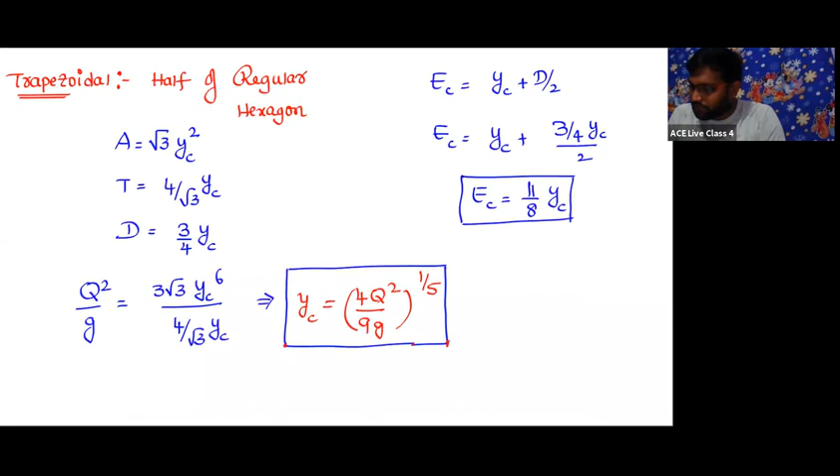Please have a look. So what is specific energy? Specific energy is the total energy per unit weight by taking the channel bottom as a datum. The basic assumption we make here is that the channel bed is horizontal and frictionless. So the specific energy is Y plus V square by 2G.

The main applications of specific energy are to define the critical flow, as discussed in the last chapter, and to analyze flow over transitions. In the case of critical flow, it occurs when specific energy is minimum, and when specific energy is minimum, the discharge per unit width is maximum.

We discussed this using the specific energy curve, showing the relation between specific energy and channel bed. Whenever there is a rise in the channel bed, specific energy decreases, and since specific energy is a function of depth, the depth of flow also varies. So to study how depth varies as specific energy varies, we use the specific energy curve.

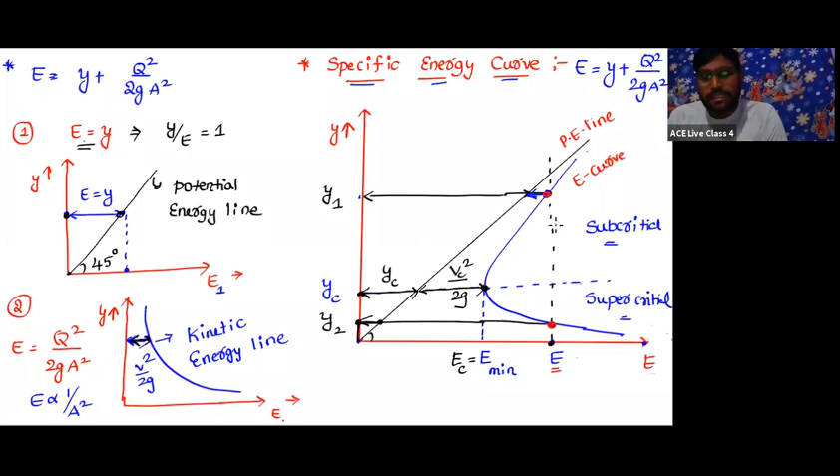In this specific energy curve, I explained how the curve is formed: E equals Y, the potential energy curve, and E equals Q square by 2G A square, the kinetic energy line. Combining these two, adding Y plus V square by 2G, gives the E curve, which looks like a cubic parabola. The shape of the E curve is a cubic parabola - not a 2-degree parabola, but a 3-degree, cubic parabola.

From there, we discussed that critical flow occurs at minimum specific energy, and for any specific energy other than minimum, there exist two depths known as alternate depths. In the E curve, the upper limb is asymptotic to the potential energy line, and the lower limb is asymptotic to the E axis. And I explained where we see the alternate depths.

Now the final conclusion is that in the E curve, in the subcritical zone, the curve is rising - meaning as specific energy increases, depth of flow also increases. In the supercritical flow, it's exactly opposite, because the curve is falling. So you can understand whether the curve is rising or falling, and based upon that you define the flow behavior.

This curve is especially useful in the case of channel bottom transition - meaning whether the channel bed rises or falls. So the specific energy curve is useful in the case of channel bottom transition.

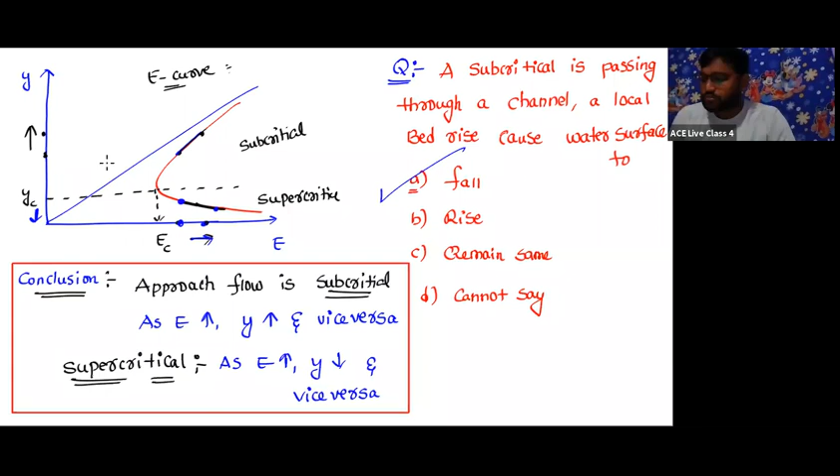Now, in order to go for the channel width transition - here there is no change in the channel bottom. When there is no change in the channel bottom, specific energy remains the same, because E1 and E2 are both the same. When E1 and E2 are both the same, you cannot use the specific energy curve. So this is a width transition.

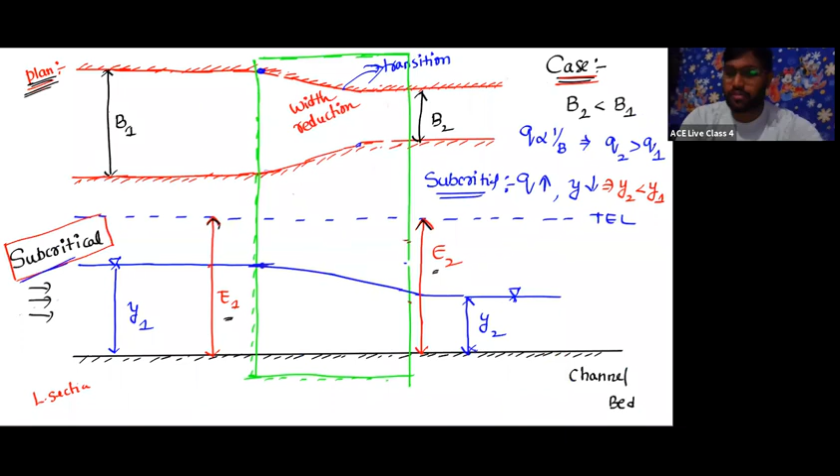Let's see how to analyze those transitions. By using this specific energy curve and discharge curve, as I already mentioned, the E curve and the Q curve are useful for flow analysis in channel transitions.

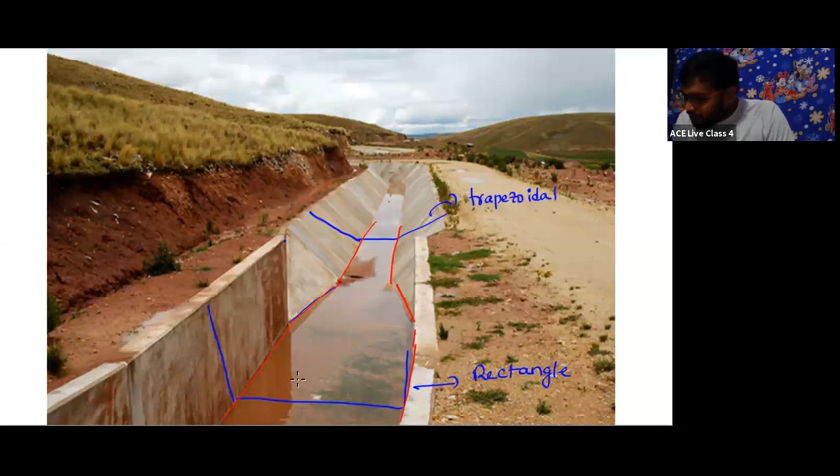If you see, the width of the channel has been reduced smoothly, yes or no? Initially the width of flow is going to be B1, and then the width of the flow is going to be B2. So in the plan view, the width has been reduced from B1 to B2. Whatever the width over here is going to be B1, and whatever the width here is going to be B2.

Now, when I allow the flow into this canal, I have to make sure whether the water surface level is going to be constant, or whether it is going to fall, or whether it is going to rise. So at this section, the cross section is going to be rectangle, and here it is going to be trapezoidal.

So during channel transition, the rectangular section changes to trapezoidal section, resulting in width transition. So I can say this is going to be a width reduction case. This is one practical example where whenever a channel cross section shape changes from one shape to another, there might be changes in the bed width, resulting in the width reduction transition.

So what is the use of this transition exactly? Whenever you are going to change the path of the flow, then definitely you require the transition. For example, you know the topography is not going to be linear, right?

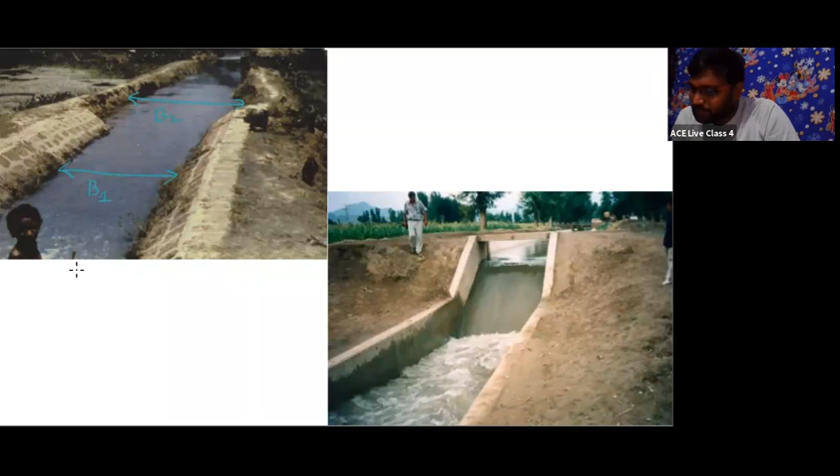This is width expansion case. And now you see here, this is a channel bed, right? And in this case, the width is going to be constant. Keep that in your mind, the width is going to be constant. This is width B, and here also width B.

But if I draw the longitudinal section, then the channel bed is going to fall like this. So the channel bed is going to drop something like this. Here this is a channel, and here this is a channel. The channel bed has been dropped like this.

So when the channel bed transitions, this is channel bed drop, transition. Whenever you are going to allow the flow from upstream to downstream, generally you allow the flow by means of channel bed drops. Why? We will discuss that later. So, channel bed drop, okay.

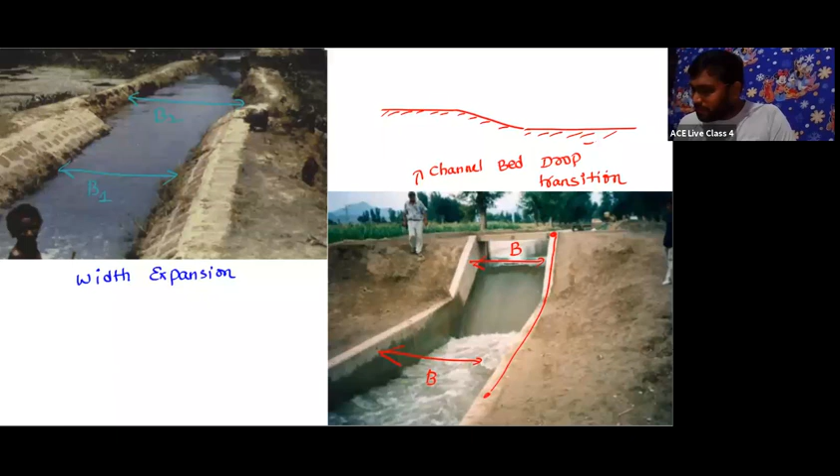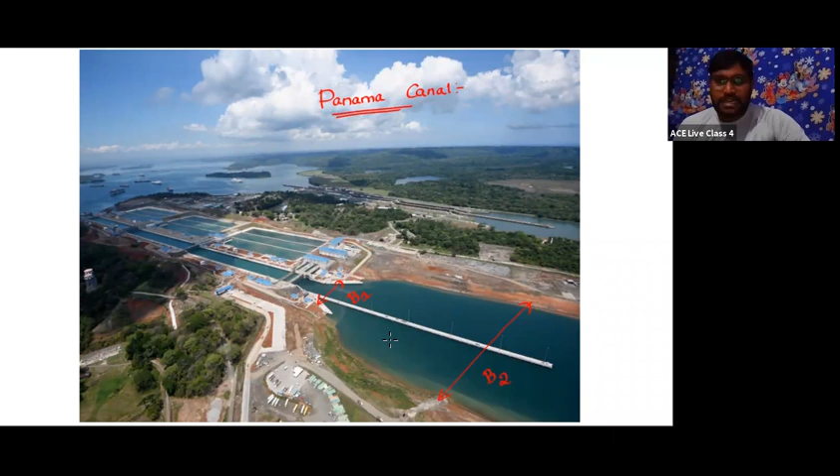So you can observe this Panama Canal is open channel flow, where the transition takes place smoothly. Observe clearly, does the transition happen suddenly or smoothly? Smoothly. They are not increasing suddenly from B1 to B2, they are increasing over a period of time. So again, what is this? Width expansion. When you see the flow coming from here, there is width expansion. If you see the flow going from here, this is width transition.

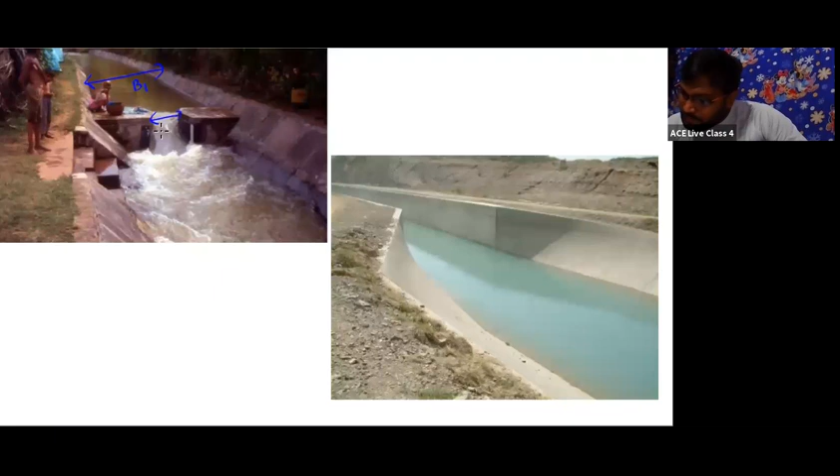Now there is the Panama Canal, and likewise you can observe over here also. So here this is the width of B1, and here this is width B2, and again here there is a width B3. So there you can observe the width is going to be reduced, and then the width is going to be expanded. So here there is a width reduction and a width expansion, my dear.

And you can see here the shape of the channel is going to be rectangle. And then similarly, there is a parabolic section, this is a parabola. And then there is a trapezoidal section. So the widths are going to change from B1 to B2. So rectangle, this is the parabola, and this is the trapezoidal.

So wherever the channel sections change from one shape to another shape, or whenever you want to lower the bed level, there we apply the channel transition conditions. And apart from this, the same figure - so what I'm showing you here is the similar type of figure. We have different names in irrigation. In irrigation, we call this one a canal fall, or a chute spillway. Some other names would be there, and we'll see that later.

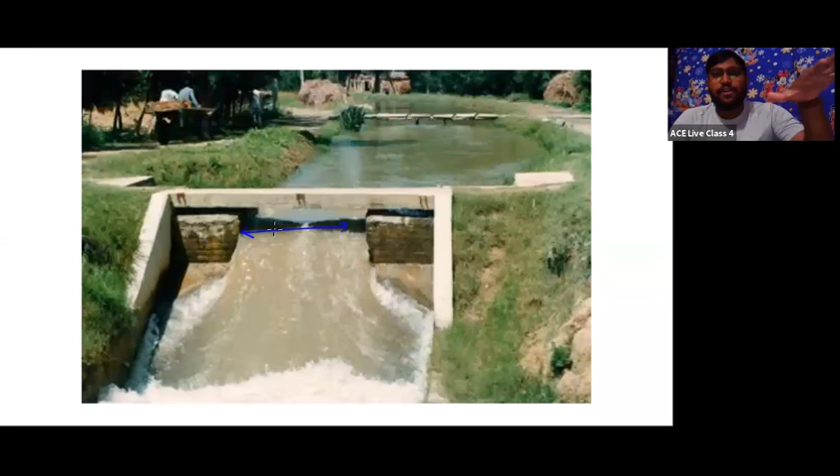Coming to channel bed drop and channel bed rise, that depends upon the topography. When the flow is happening from high level to low level, you have to lower down the bed. Here there is a width expansion and a channel bed drop — you can observe this is nothing but a double transition.

Here this is a double transition because B1 and B2 are different widths, and the channel bed is also going to drop. If I draw the channel section, this is the channel bed drop — so bed drop and width expansion together. This is the double transition, my dear.

So now let's see how we are going to do the analysis for this by using the specific energy and discharge curves.

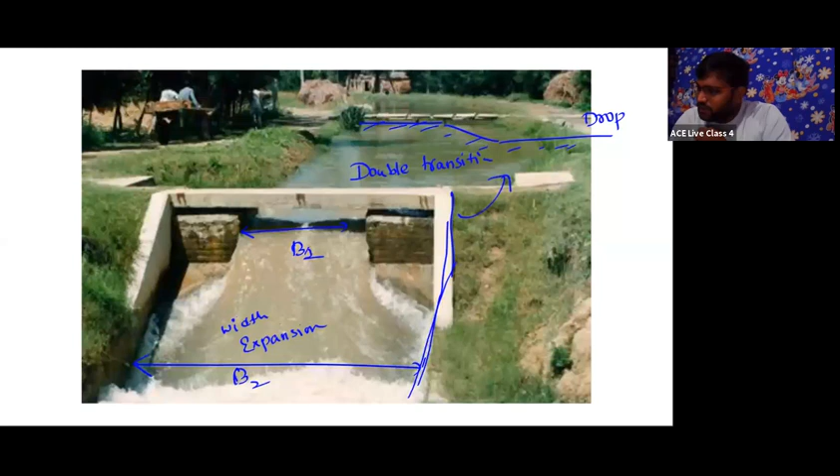In the example, why did this textbook specifically provide a parabola curve? They provide the parabola curve specifically for achieving the smooth transition — in order to make sure the transition is smooth, they provide the parabola curve.

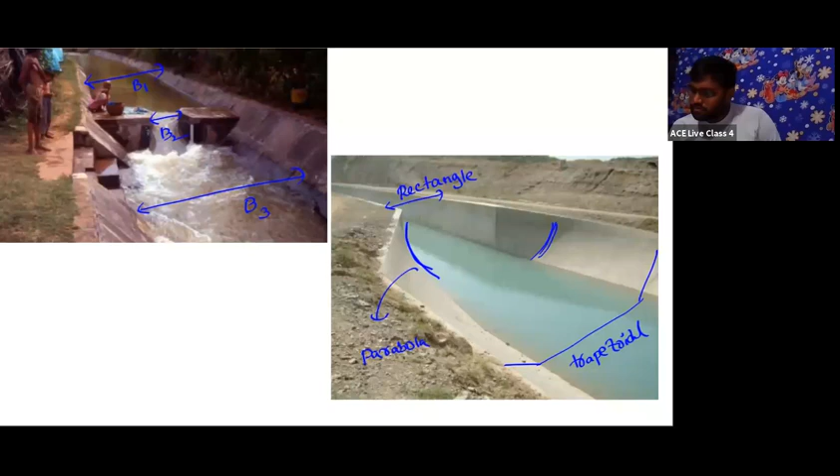Okay, fine. Now let's come to the analysis of channel transitions. In the case of channel transitions, we have a channel width transition and a channel bottom transition.

Keep one thing in mind: we are going to discuss one transition at a time. We don't discuss both transitions at the same time, because theoretically it is not possible to predict the flow behavior for double transitions.

Then what to do, sir? We go for numerical or experimental analysis. So from the exam point of view also, what I'm going to analyze is single transitions, and then we apply numerical analysis for the double transitions. Keep that in mind.

When I discuss one transition, meaning if the channel bottom rises or drops, we keep the width constant — there is no transition in width. Similarly, whenever there is a channel width transition, we assume the channel bottom remains horizontal, meaning there is no channel bottom transition.

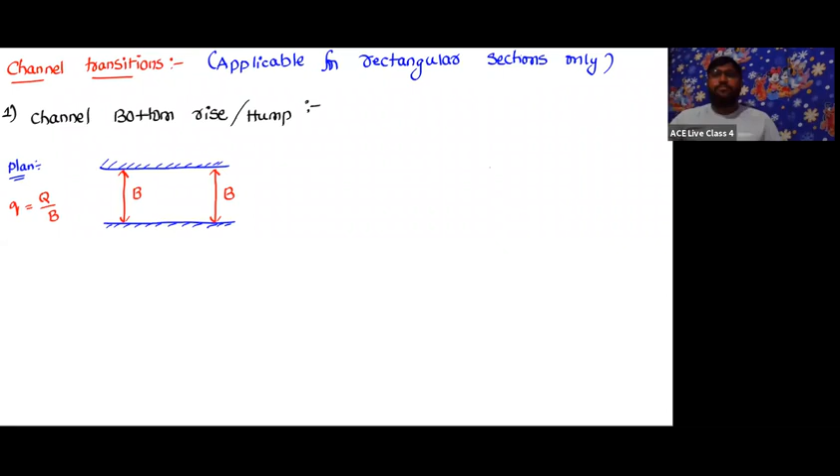So what we are going to do here is, we are going to assume the channel bottom remains, the channel width remains same. Assume channel width remains same throughout the transition. Channel width is going to remain same throughout the transition. So throughout the transition, we are going to make sure the channel width is constant.

And now, if I draw the sectional view, what I'm showing you here is a channel bottom rise, right? So now, keep that in your mind. You have to rise it with a smooth transition. So this is a channel bed rise. Let me draw these things.

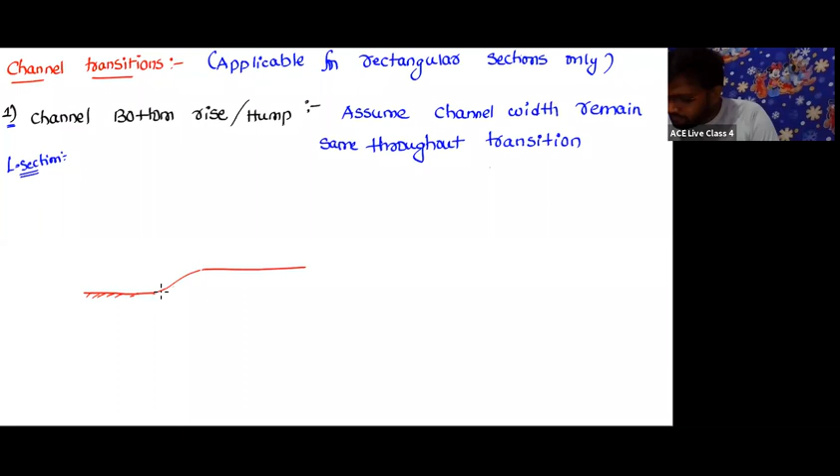So it remains same throughout the channel. Let me draw these things over here, because I want the longitudinal section. In the longitudinal section, you see the channel bottom is going to rise. The channel bottom is going to rise. Let's take the channel bottom rising by an amount of delta Z. By an amount of delta Z. Keep that in your mind.

The channel bottom, see point number one: assume channel width remains same throughout the transition. So whatever the width is over here before the transition and after the transition, the width is going to be same. This is going to be B1 and here it is going to be B2, both are same. So the width before the transition and after the transition is going to remain same.

And the second point is we need to assume the channel bed should be horizontal and frictionless, before and after transition. So before and after transition, I am going to make sure whatever the channel bed is, it is going to be horizontal and frictionless.

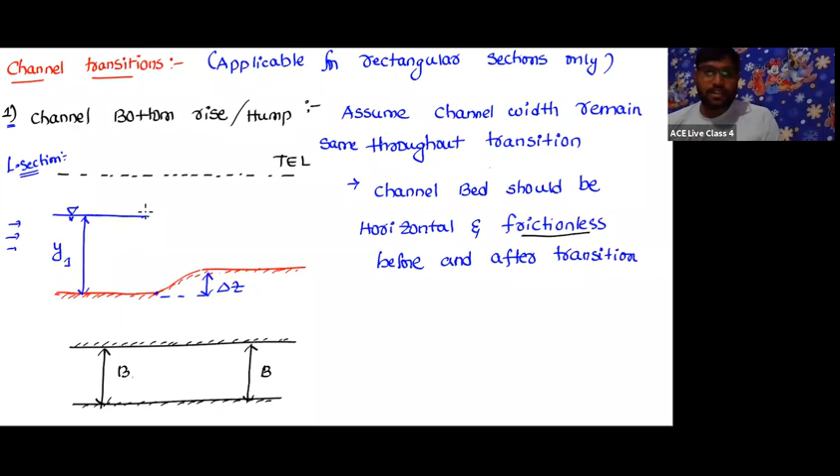Now I am allowing a flow. Let's take the depth of flow initially. The depth of flow is going to be y1, okay, and it is going to be same up to this point, same like this. Yes or no? Now you see there is a transition, and in this zone of the transition, what is going to happen?

That's what we require now. So for that, let me take this. Which curve is going to be useful for the analysis of a channel bottom transition? Now you tell me. As the channel width remains same throughout the transition, which curve is going to be suitable? Specific energy curve or discharge curve? So, specific energy curve.

If you observe over here, yes, now please have a look. Whatever the specific energy before that transition, this is known as E1, and whatever the specific energy after that transition, this is known as E2. Okay, so now from this, can I write E1 equals E2 plus delta Z?

So as the specific energy changes and the Q remains constant - Q remains constant because what is small q? Capital Q by B. So as the specific energy changes and the Q remains constant, which curve is going to be useful? So the specific energy curve, or in simple words, the E curve is used for analysis. These are the points that we need to keep in mind.

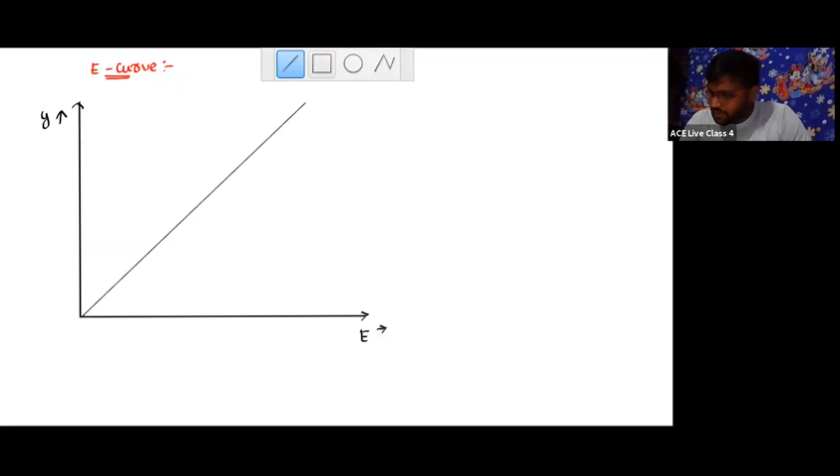So whatever this curve is going to be, the E curve, don't think this is going to be parallel to the potential energy line. And you know why it is not going to be parallel to the potential energy line. So keep that in your mind.

Whatever this is nothing but E minimum or EC, and the corresponding depth is going to be YC. And you know, above this zone is going to be subcritical.

So now let's observe. See, whatever curve we need to analyze, we have the curve, and the entire data required for that is ready with us. Now let's see point by point.

What is happening? When the channel bed rises by delta Z, that's point number one, keep that in mind. When the channel bed rises by delta Z, what is happening to specific energy? When the channel bed rises by delta Z, specific energy decreases from E1 to E2. Yes or no?

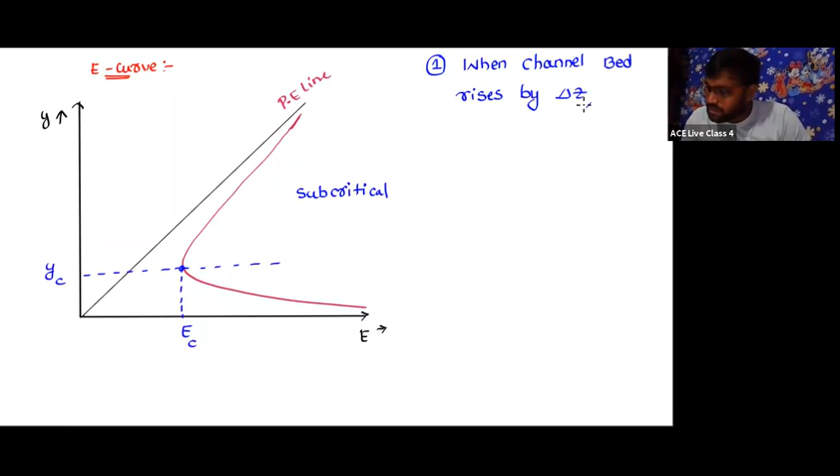So this is the specific energy, right? The specific energy decreases from E1 to E2. Specific energy decreases from E1 to E2, which means E1 is greater than E2, and E1 equals E2 plus delta Z.

Yes or no? Now let's see if the approaching flow is going to be subcritical. You know how to say whether the flow is subcritical or supercritical? Whenever the Froude number is less than 1, that is going to be subcritical. And if the Froude number is greater than 1, that is going to be supercritical. So first of all, let's keep this point in the graph.

Now here is a graph, right? So in this graph, let me take this as specific energy decreases, right? Let me take this as E1. Now, due to when the channel bed rises by delta Z, what is happening? Specific energy decreases from E1 to E2. Now this is going to be E2.

Now my dear, this specific energy decreases from E1 to E2 by how much? By delta Z only, right? What is the difference between E1 and E2? Delta Z. So which means, can I say this difference between these two is delta Z? Yes or no? So now from the starting onwards to this point, whatever this is, is nothing but E1. And can I write E1 as E2 plus delta Z? So point number 1, when the channel bed rises by delta Z, specific energy E decreases from E1 to E2 by delta Z.

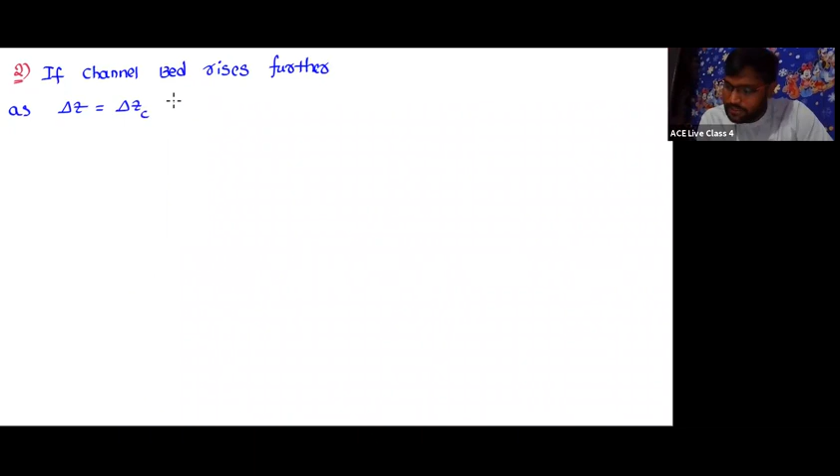Point number 2. When or if channel bed rises further as delta Z equals delta ZC, then specific energy becomes minimum. When specific energy becomes minimum, then E2 equals E minimum equals EC.

Then what is the relation between the specific energies? This is nothing but E1 equals E2 plus delta ZC. So now on the upstream side, the specific energy is going to be E1 only. But on the downstream side, now E2 becomes EC and delta Z becomes delta ZC.

So this will result in what type of flow? Results in critical flow, and downstream water level depth shifts as Y2 equals YC. Downstream water level depth will shift as Y2 equals YC, because this is going to be the critical flow.

Now I hope you understood what is happening, because what I am discussing is nothing but subcritical flow. See, I am not saying here as a water level depth falls or rises, I am directly saying as a shift. So if you have any doubt, please understand these values. So if you raise the channel bed by delta ZC, then E2 becomes E minimum or EC. So what is EC? EC is nothing but the E minimum. Then the water level depth is going to be fall by YC.

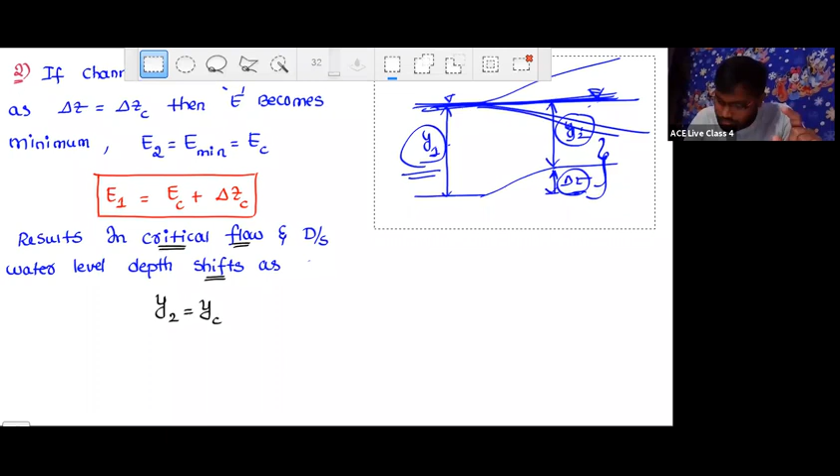Okay, so now the thing is, what if I raise the channel bed beyond delta ZC? I'm going to raise the channel bed beyond delta ZC. See, understand it clearly. What I'm showing you is in different variations. If I would have raised the channel bed now, this is a delta Z which is greater than delta ZC.

What if I raise the channel bed beyond delta ZC? If I raise the channel bed beyond delta ZC, what is going to happen to the E2? This E2, so my dear, now this E2 is going to be less than EC.

Is it possible? What is the meaning of E2 less than EC? You can observe in these figures: first E1, then E2 plus delta Z. Then if I raise by delta ZC, E becomes EC. If you raise more than delta ZC, then what is happening to E2?

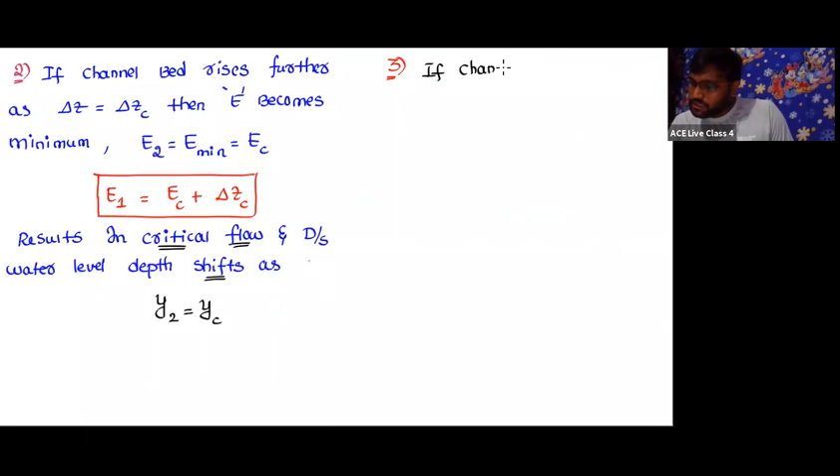Point number 3: if channel bed rises beyond delta ZC, let's say delta Z is greater than delta ZC, then specific energy should reduce, or specific energy should be less than E minimum, which means E2 should be less than E minimum. Is it possible? No, which is not possible.

Which is not possible, and flow gets stopped. Such a type of condition is known as choked condition. Flow gets choked, meaning flow is going to be stopped.

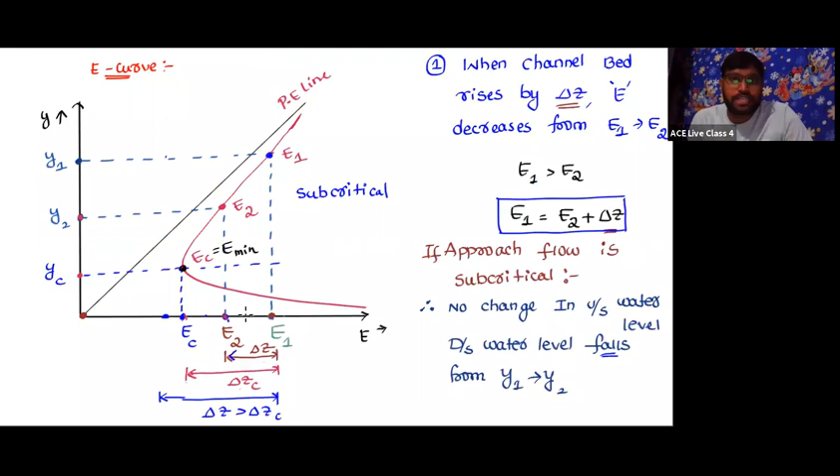So if I raise the channel bed, E should be less than E minimum. Generally, whatever mechanism I'm going through here, actually what is happening is you raise the bed, specific energy is decreasing, and if that is the case, then E2 is going to be less than EC. But I am telling you it is not going to be possible.

Someone might say, okay sir, you are saying it is not possible, but in reality I have to raise the channel bed more than delta ZC, sir. Then what is going to happen, sir? Now think, see, already you are going to raise the delta ZC, and if you want to raise delta Z more than delta ZC, whatever this is, nothing but delta Z more than delta ZC, and you want the flow to happen.

If you want the flow to happen now, the only possibility is: point number one, the difference between the specific energy should be delta Z. This is going to be E2, but this E2 is less than EC. This E2 is less than EC, it is not going to be possible, so I can remove this case.

Now, point number two is by keeping the downstream E2 as EC only. Now, if I increase the channel bed as delta Z, which is greater than delta ZC, what is going to happen? This is case 2, my dear. What I'm representing here is nothing but case 2.

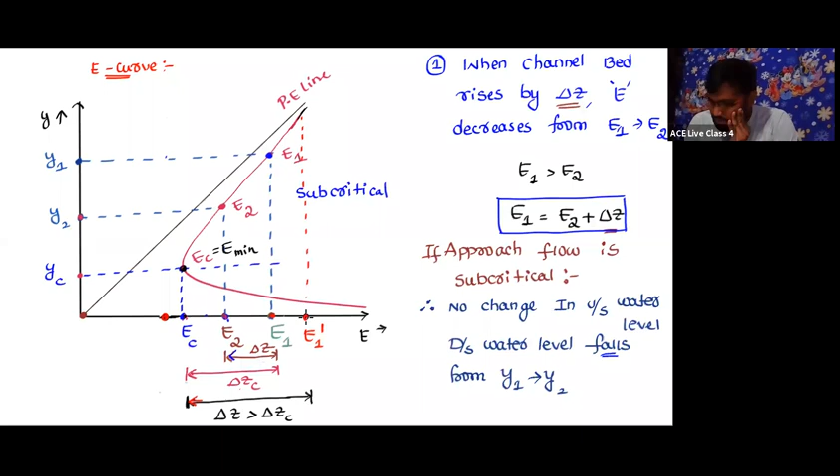Okay, now if E1 is going to change to E1 dash, let's come to the graph again. If E1 is going to change to E1 dash, now for this E1 dash, if I drop a line, what is happening to the value? Now this is going to be E1 dash.

What about here? This is E1. Now what is happening? Everything is explained in this graph itself. So at first, specific energy is going to be decreased from E1 to E2, and then it decreases to EC.

Now if you rise further, then this value cannot be less than this one. The specific energy cannot be less than EC, so E2 becomes EC, but E1 is going to be changed from E1 to E1 dash. Then what is happening to Y?

So this is Y. What is happening to Y? Y is going to be increased from Y1 to Y1 dash. And what about Y2? Y2 will remain YC.

So from this graph, I can say when the specific energy rises from E1 to E1 dash, who is going to be changed? Upstream or downstream? Upstream is going to be changed from Y1 to Y1 dash. So I can write from here, from E curve.

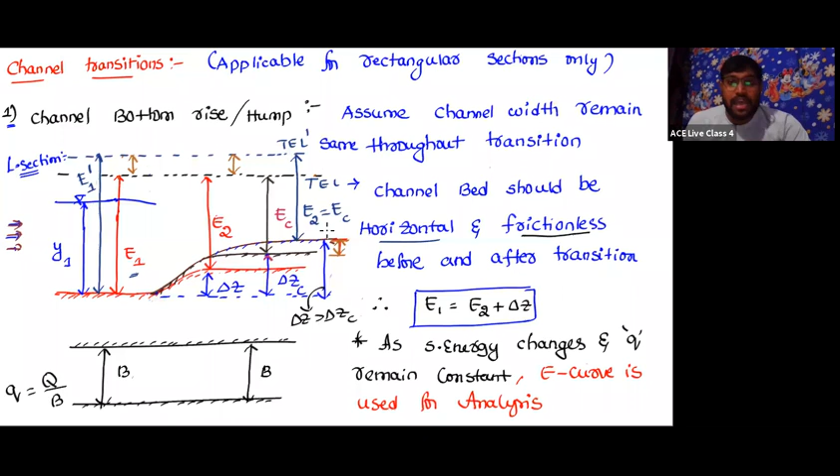The upstream specific energy will increase by exactly this value: 0.7 minus 0.5, which is 0.2. So the difference between E1 and E1 dash is nothing but the difference between delta Z and delta ZC. Whatever excess bed rise you do, that much the total energy line is shifted. So with this example, if you raise a channel bed by more than 0.5, that much specific energy increases.

Now still it's not completed. Let me handle this with a figure, the practical view.

So in order to not cause any changes in the upstream, when is the upstream water level going to change? Whenever the channel bed rises more than delta ZC, then only the upstream water level is going to change. Yes or no? So if you don't want any change in the upstream, then what is the maximum rise that you need to do? The maximum rise without change in upstream is going to be delta ZC only, because I can write a note point over here.

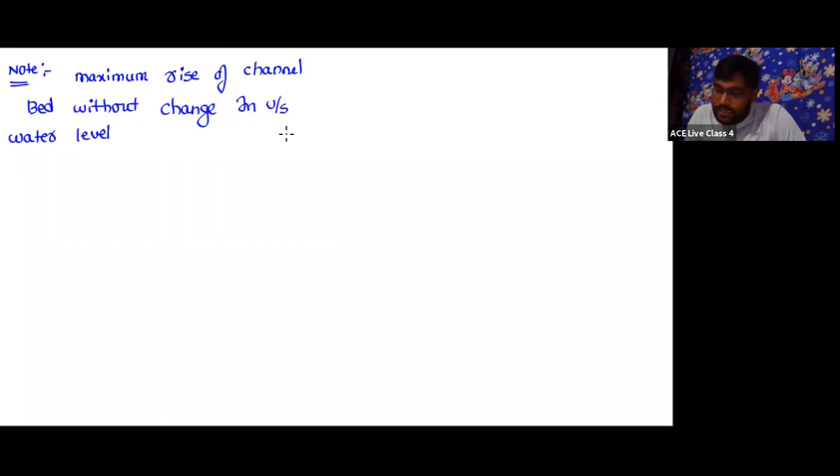The note point is the maximum rise of channel bed without change in upstream water level, is delta ZC. Why? Because up to delta Z equals delta ZC, there is no change in the upstream, only the downstream is going to change.

So whenever the delta Z is going to be more than delta ZC, then the upstream water level starts to change. Yes or no? So this is happening when the delta Z is more than delta ZC.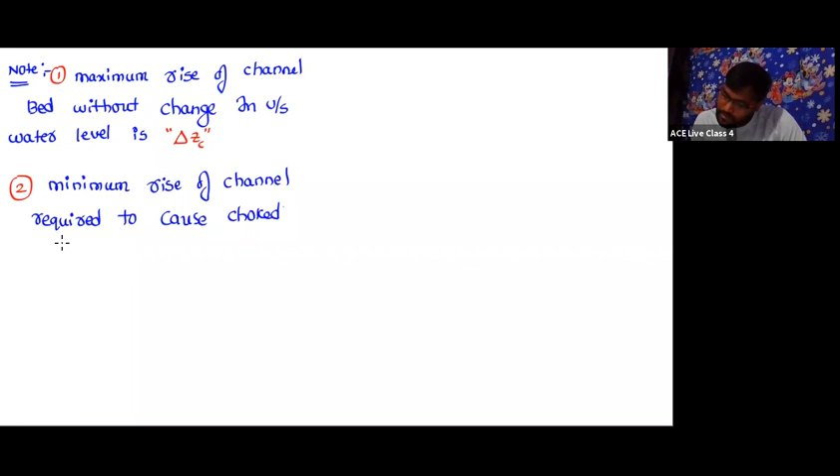Or second one, the minimum rise of channel bed required to cause choked condition is also delta ZC. So whenever delta Z becomes delta ZC, from there only the choked condition is going to happen. Yes or no? So the minimum rise required to cause a choked condition is delta ZC, because once you go beyond delta ZC, then obviously the choked condition is going to exist.

And the maximum rise without any change in the upstream water level is also delta ZC, because if you go beyond delta ZC, the upstream water level gets disturbed. Okay, so now I hope you understood the figure.

Please try to analyze this specific energy curve clearly, because this is very, very important. If you can understand this specific energy curve, then I don't need to explain much. So please go through the specific energy curve once, what is happening actually. You observe these figures, I'm giving you everything in this case.

First E1, then the channel bed rises by delta Z, specific energy decreases from E1 to E2, flow depth decreases from Y1 to Y2. Please listen once again, I'm giving a final review. So whenever the channel bed rises by delta Z, specific energy decreases from E1 to E2, and when specific energy decreases from E1 to E2, flow depth decreases from Y1 to Y2.

Now, if the channel bed rises further as delta Z becomes delta ZC, then specific energy E2 becomes EC, and Y2 becomes YC. So there's no change in upstream, but Y2 becomes YC. So critical flow occurs at delta Z equals delta ZC.

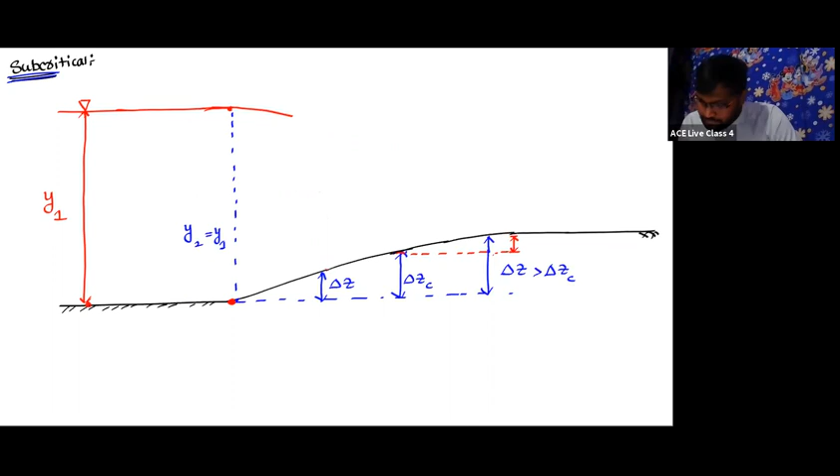So up to delta ZC, the water level is going to be fall, fall, and now by the time it reaches delta ZC, at this point, can you please tell me what is the flow depth over here? The depth of flow is going to be Y2 is equals to YC. So whatever I am drawing over here, this is the water surface. So the water level falls and reaches the water level Y2 is equals to YC.

Now you see, from here only everything is going to be changed. So if I rise the delta Z beyond delta ZC, the downstream specific energy becomes EC only, but whatever the depth is going to be, is it same or not? You see, now in the case of delta Z greater than delta ZC, the downstream water level depth should remain as Y2 is equals to YC.

The water level depth should remain as Y2 is equals to YC. So what is the tendency of the water level here? What is happening? The tendency of the water level is going to be falling like this. But now, when I rise the delta Z beyond delta ZC, up to delta ZC water level has fallen down, so that Y2 is going to be YC. Y2 less than Y1 and Y2 becomes YC.

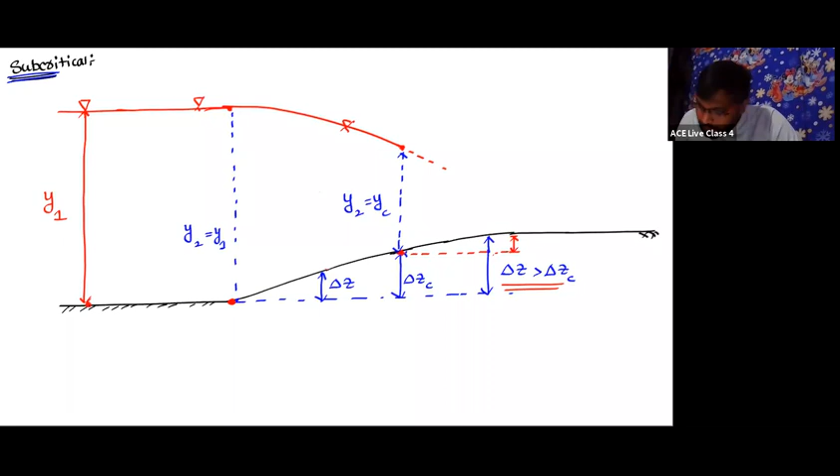Okay, fine. Now think clearly: when you rise the channel bed delta Z more than delta ZC, what is the downstream depth? The downstream depth will remain as YC. So if the downstream depth is going to remain as YC, now whatever the depth everywhere, here the depth should be YC, and here also the depth should be YC. So everywhere the depth should be YC.

Now, this is a case where the channel bed rises more than delta ZC. Whenever the channel bed rises more than delta ZC, what is happening to Y2? Y2 is still going to be YC. This magnitude is YC and this magnitude is also going to be YC. Whenever the magnitudes of the depth are the same, the channel bed rises by how much extra? This is the extra. So now, is the water level going to fall or is it going to rise? Come on, tell me.

Up to this point of delta ZC, the water level has fallen down, and now the downstream water level is going to rise like this.

Now some of you are asking, sir, why is the specific energy changing now? You see, if you raise the channel bed more than delta Z greater than delta ZC, the tendency of the water level is going to be falling. So this dotted line is nothing but the tendency. But when you raise delta Z more than delta ZC, the downstream water level depth remains critical. What is the meaning of remains critical? Y2 is equals to YC, and here also Y2 is equals to YC.

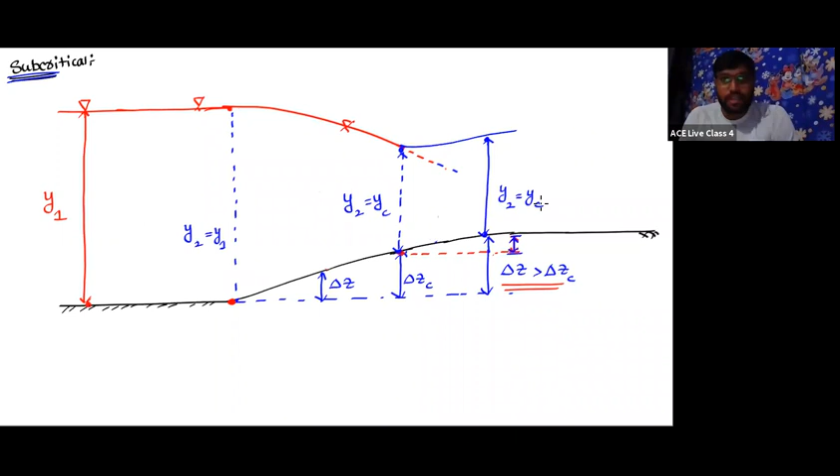So this water level is going to rise. Is it against the tendency or with respect to the tendency? It is against the flow behavior. And now what happens is this water level falls and suddenly rises.

Due to this sudden rise, it creates a wave movement, and this wave movement will travel towards the upstream. And this wave is known as a surge. In simple words, when you raise the channel bed more than delta ZC, the flow will not be steady. The flow will become unsteady.

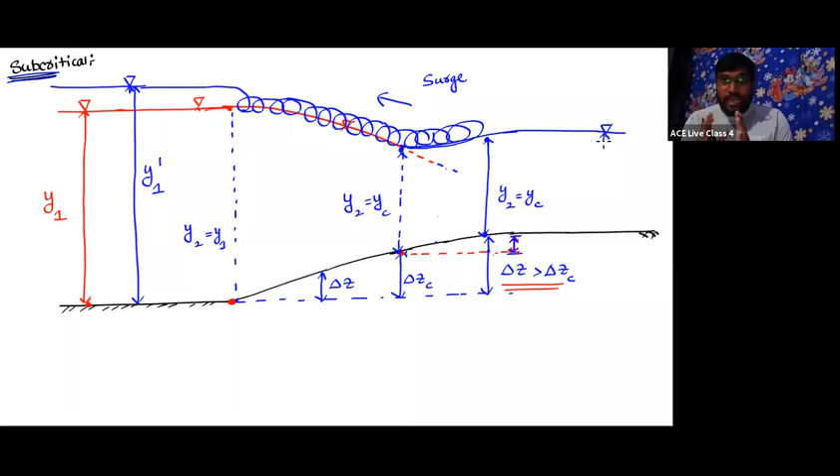So whenever the wave movement is created, this wave movement will travel towards the upstream, and then the upstream water level is going to change. Now it is no more the initial water level. Now the depth of the water level on the upstream side is going to be Y1 dash, and on the downstream side, the depth is going to be Y2 is equals to YC. So observe the point clearly. What I'm going to say now again is this surge is nothing but an unsteady flow.

So whenever the channel bed rises more than delta ZC, how much do you rise? You see, here the depth is going to be YC, and here also the depth is going to be YC. How do you make sure both depths are YC? At delta ZC, the depth is YC. Because when you make delta Z equal to delta ZC, E2 equals EC. When you make delta Z more than delta ZC, E2 still equals EC. So in both cases, Y2 is going to be YC.

And when does Y2 become YC? When does Y2 become YC? When the water level shifts like this, then only Y2 will become YC.

So in the natural state, in practical terms, you're an engineer. Whenever you raise delta Z more than delta ZC, what happens is up to delta ZC the water level falls. And if you raise the channel bed more than delta ZC, please observe this zone only. In this zone, instead of falling, the water level rises. And once the water level rises, it is against the tendency. As it is against the tendency, due to this sudden rise of water, this water will create a wave pattern, and this wave pattern will move towards the upstream.

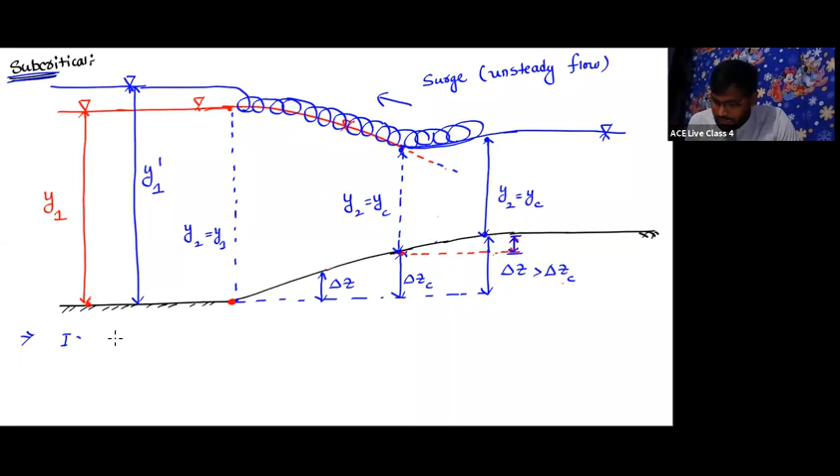So I can write: once delta Z is greater than delta ZC, then flow becomes unsteady, and the surge will travel from downstream to upstream, resulting in a change in water level and in specific energy on the upstream side because of the unsteady nature.

So a lot of people are asking why the specific energy changes, sir. Because due to the surge, it becomes unsteady flow. So the upstream specific energy increases from E1 to E1 dash.

I hope you understood. If you still don't understand, here's the practical reality: first the flow depth decreases, decreases, decreases up to delta ZC. And if you go beyond delta ZC, then a surge is created and it moves towards the upstream. So when the surge travels towards the upstream, the flow gets disturbed. So the upstream depth changes, and the upstream specific energy also changes. So this is what happens while the flow is subcritical.

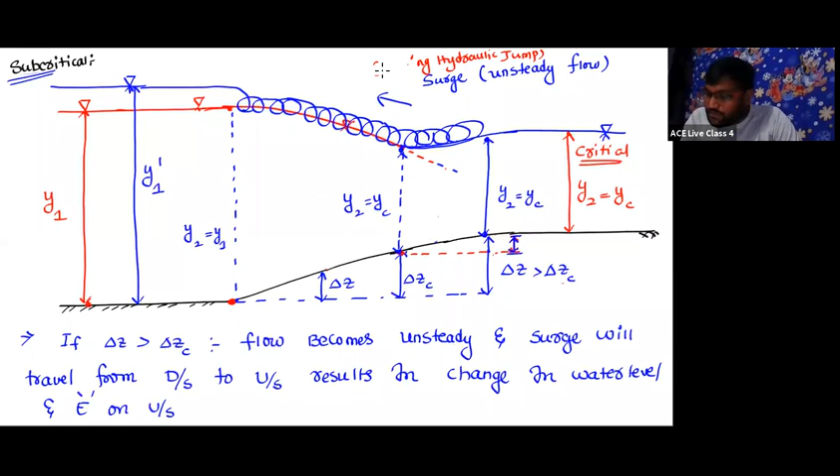So there is a difference between the hydraulic jump and the moving hydraulic jump, but don't worry about that, we'll discuss it later. What is the difference between the hydraulic jump and the moving hydraulic jump? But as of now, I hope you understood this. To make it much more clear, let me write the conclusion: when delta Z equals 0, then E1 equals E2.

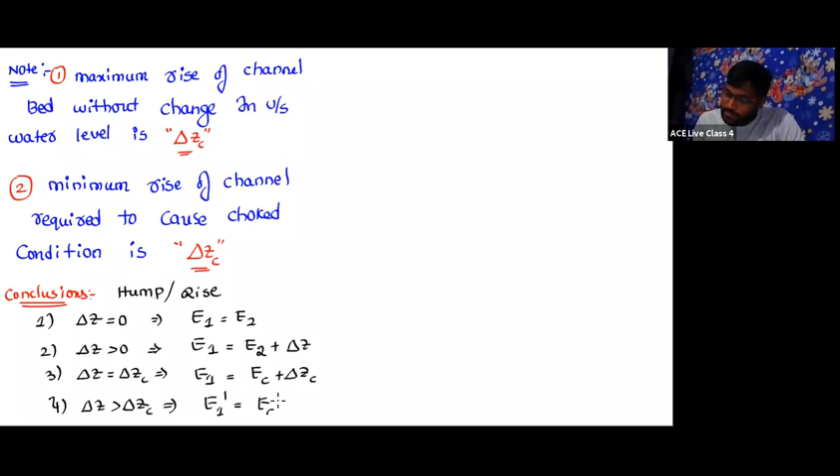Delta Z greater than 0 means the hump will rise. Then E1 is equal to E2 plus delta Z. When delta Z is equal to delta ZC, E1 is equal to EC plus delta ZC. When delta Z is greater than delta ZC, then E1 becomes E1 dash and EC becomes EC plus delta Z. So these are the relations between the specific energies with respect to the rise of channel bed.

Now I want to give one more data with respect to the tabular form. I am showing you the specific energy with respect to the longitudinal section, and I explained the concept with respect to the specific energy curve, giving you the points and how the flow practically happens. Now I'll give you the graphical representation.

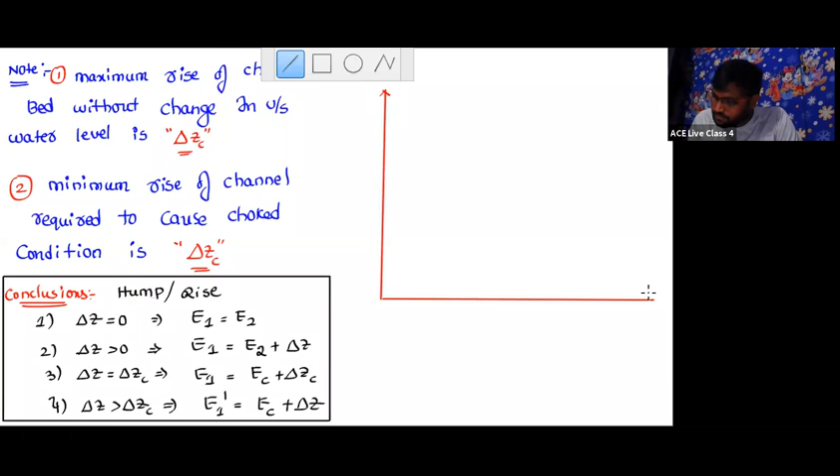Have a look at the graphical representation. On the x-axis is delta Z, on the y-axis is upstream and downstream flows, y1 and y2. This is for the subcritical zone, where the channel bed rises in the case of subcritical flow. Let me explain from here. This is delta Z equals 0, and somewhere delta Z equals delta ZC.

I want to show the variations here. Understand this, these graphs are very important because in recent years they've been asking about these things. This is an untapped area, it hasn't appeared much in GATE or IES. If I were an examiner, I would be the first to ask this question because it's untapped. So think carefully.

What happens when delta Z is 0? When delta Z is 0, are the specific energies the same or not? When the specific energies are the same, with delta Z equal to 0, the flow is subcritical, meaning the flow depth is large. Initially this is the flow depth. As the flow depth is large, you can observe at this point Y1 and Y2 are both the same.

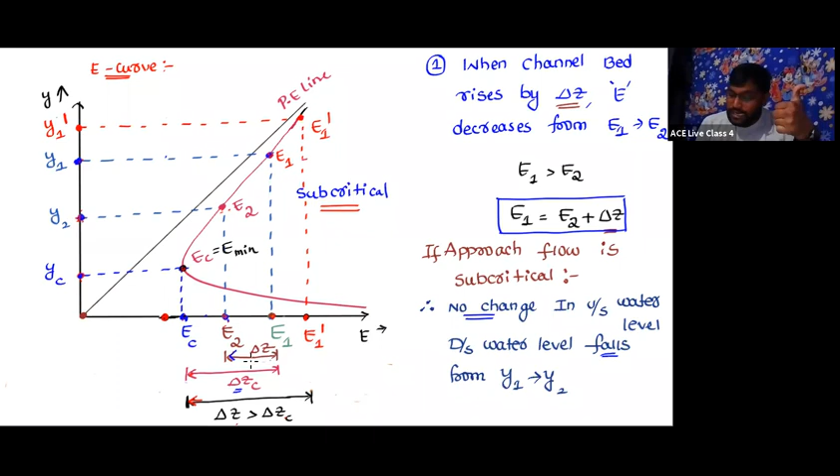When delta Z equals 0, E2 and E1 are both the same, Y2 and Y1 are both the same. Now, as delta Z increases, Y1 remains constant but Y2 decreases. Accept or not? And when delta Z goes up to delta ZC, which one changes - downstream or upstream? Think and say, downstream or upstream?

Downstream. So up to delta ZC, I am taking the upstream depth Y1 to be constant. Up to delta ZC, the upstream depth is constant, Y1. Any doubt with that? Now about the figure - up to delta ZC, I have shown you the red line only. The red line represents the initial depth. Y1 is constant and Y2 changes.

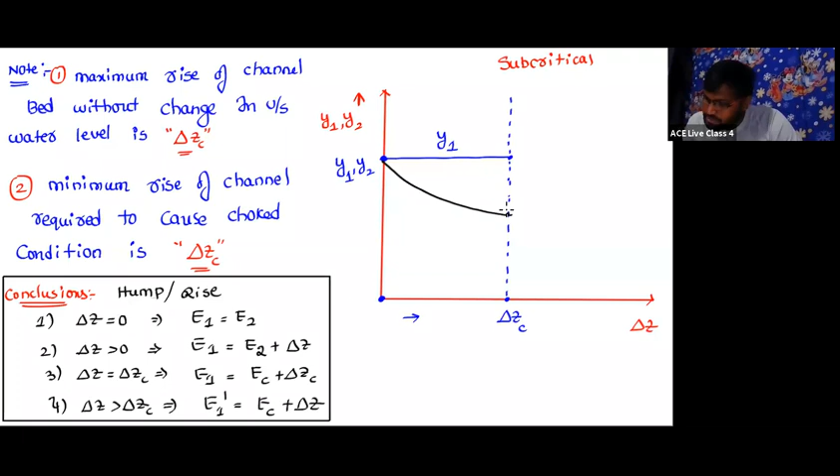Now what happens to Y2? Y2 decreases, and this is the variation of the water surface depth of Y2. So now at delta ZC, what is this Y2? Y2 is equal to YC. And what is Y1? Same. So now I hope you understood.

At delta Z equals 0, Y1 and Y2 are both the same. And at delta Z greater than 0 and less than delta ZC, as delta Z increases, the downstream water level falls as Y1 goes toward Y2.

So Y2 is less than Y1. In this figure, I am representing that Y2 is less than Y1. Now when delta Z equals delta ZC, Y1 is still Y1. But what happens to Y2? When delta Z equals delta ZC, Y2 equals YC.

Now if I go beyond delta ZC, is there any change in Y2? Everywhere Y2 is going to be the same. If you go beyond delta ZC, the downstream depth is going to remain constant with Y2 equals YC.

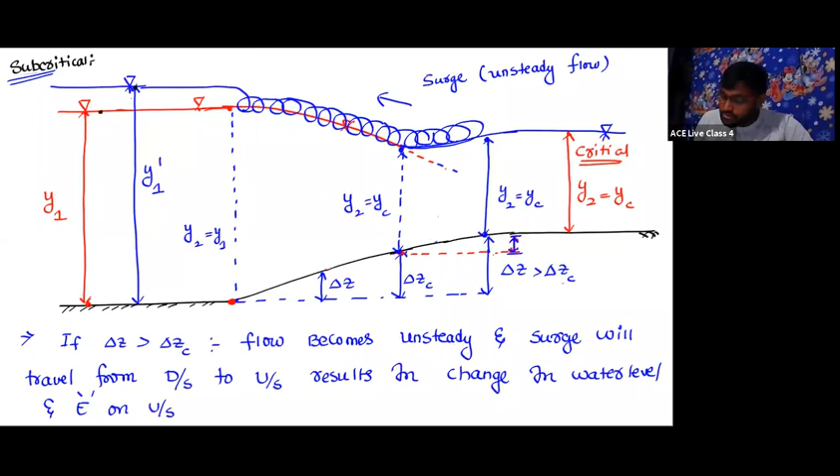But what is happening when delta Z is more than delta ZC? What happens to Y1? Y1 is going to increase to Y1 dash. So now Y1 is going to increase to Y1 dash.

This is nothing but Y1 dash. This graph represents that up to delta ZC, there is no change in the upstream water level depth Y1. Beyond delta ZC, the upstream water level depth increases. And up to delta ZC, the downstream depth decreases and remains critical. Beyond delta ZC, Y2 equals YC.

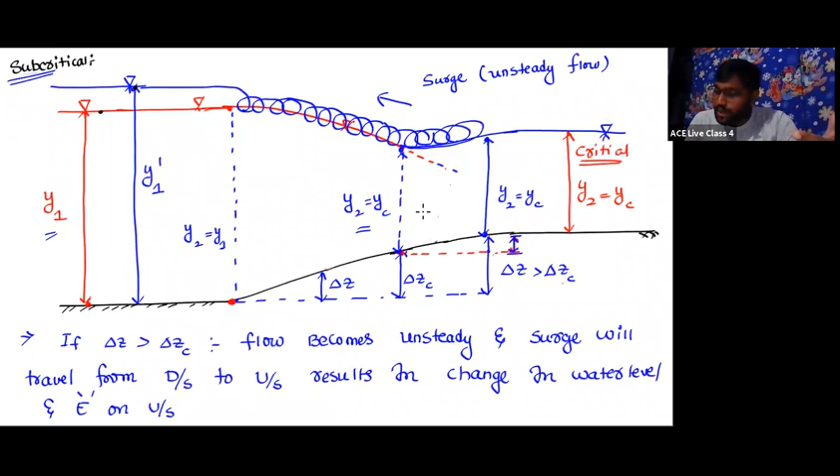If you still have any doubt, see this figure. Up to delta ZC, Y1 is constant and Y2 reduces to YC. Beyond delta ZC, Y2 becomes constant and Y1 increases to Y1 dash.

So if you still feel this is boring, that's up to you, because I have given you all the ways. Why I take so much time for one transition is, if you understand this transition, you can understand the remaining transitions clearly. I hope you understood this. So if you have understood, let's have a small break. This is the final thing. You can see this figure if you want.

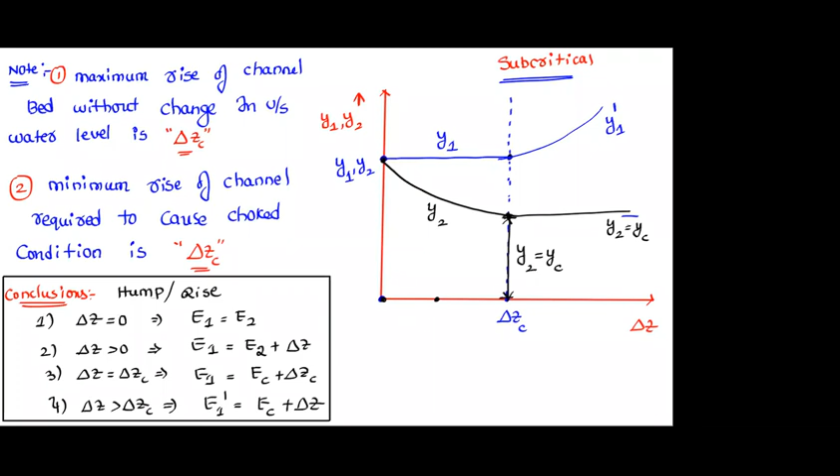As we have discussed the subcritical flow, let's come to the supercritical flow. If it is supercritical flow, I won't give this much explanation, I'll directly go with the specific energy curve. So this is about subcritical flow, and for all these things I have given this much information.

Now, in the case of supercritical flow, if the approaching flow is supercritical, what is going to happen? I hope most of the people are there. Okay, fine, now see.

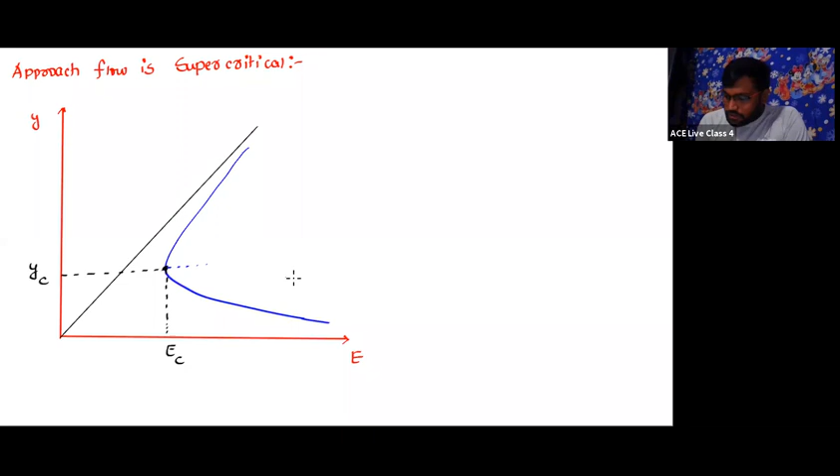I don't need to write every point now, as you know what happens when the channel bed rises further and further. If the channel bed rises, at first, if the channel bed rises by delta Z, you know this is nothing but the total energy line.

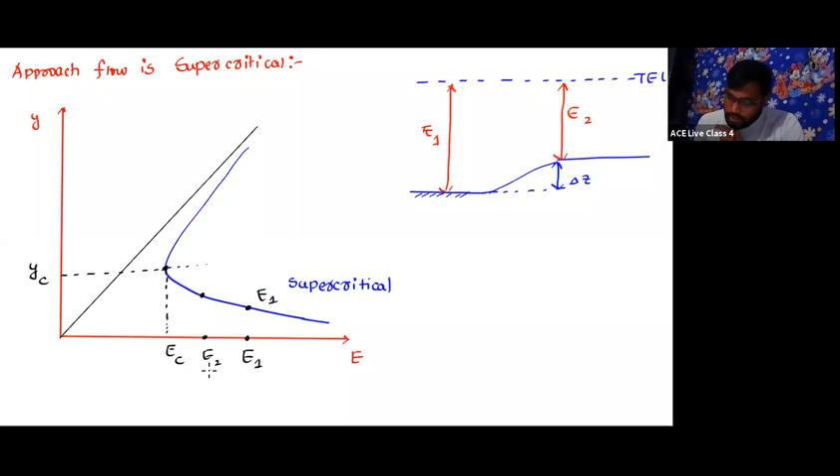Point number one, as the channel bed rises by delta Z, the specific energy E1 will reduce to E2. So now specific energy, somewhere it is going to be E1, and E1 is going to be reduced to E2. By how much? By delta Z. So this value is going to be delta Z.

Then what happens to the depth of flow? When the specific energy decreases from E1 to E2, in the case of supercritical flow, what is happening to the depth of flow? You see, whatever this depth of flow is, this is nothing but Y1. For E1, the corresponding depth of flow is going to be Y1.

Now, when you raise the channel bed by delta Z, as the specific energy decreases, this is a supercritical flow which is inversely proportional. So the depth of flow is going to increase from Y1 to Y2.

So as the specific energy decreases, the depth of flow is going to increase. Here Y1 is going to increase to Y2, my dear.

Now, if I raise the channel bed by delta ZC, then E2 is going to become EC. So E2 equals EC when delta Z equals delta ZC. If I take it as delta ZC, then E2 will become EC. When E2 becomes EC, then Y2 will become YC.

Y2 will become YC. So in the case of supercritical flow, the depth of flow is going to increase. Whereas in the case of subcritical flow, the depth of flow is going to decrease to YC.

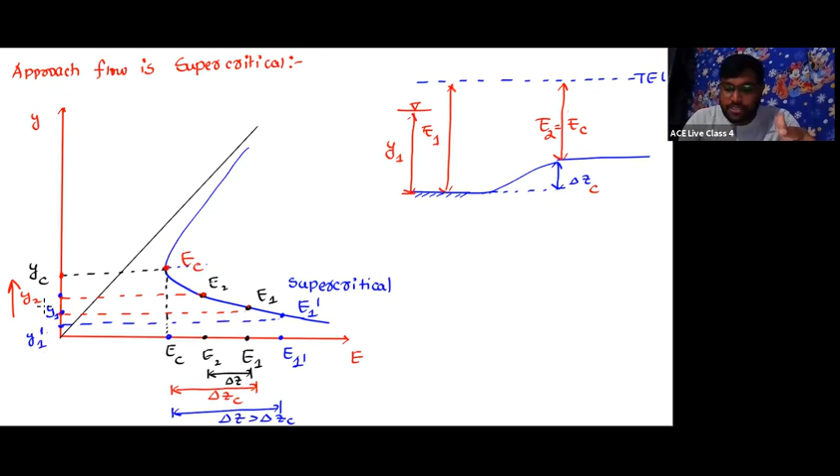This is exactly opposite. So whenever you raise the channel bed beyond delta ZC, where delta Z is greater than delta ZC, the total energy line shifts as TEL dash because of the unsteady nature. But the downstream flow, E2 equals EC, and upstream specific energy increases from E1 to E1 dash. The concept is the same in both subcritical and supercritical.

Once you apply E1, E2, EC and E1 dash, then you can understand whether the water level depth is going to increase or decrease. Okay, so now let me draw that.

Again, this is the channel bed. Whatever this channel bed rise is, let's say this is delta ZC, and here this is delta Z, which is more than delta ZC. So this is the excess rise beyond delta ZC.

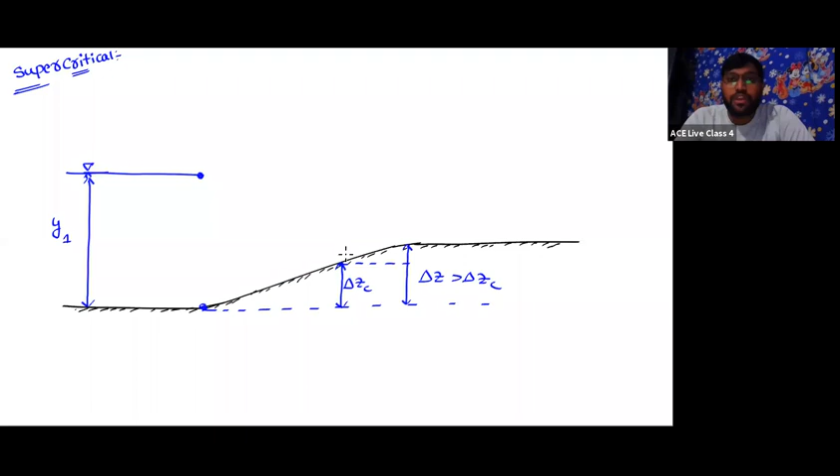So now, you know that in the case of supercritical flow, as the channel bed rises, the depth of flow increases. So at this point, whatever this Y2 is, it is nothing but Y1. But if I raise the channel bed, the depth of flow will increase, right? And now, while it is increasing, up to delta ZC, the depth of flow increases like this.

Keep that in mind, this water surface will not be parallel to the channel bed, because the depth is going to be changing. Is this depth increasing or decreasing? Increasing. So anywhere, it is not going to be parallel to the channel bed.

By the time it reaches delta ZC, whatever the depth of flow here, this is nothing but y2 equals yc. Now the tendency of the water level is going to rise, yes or no? But once you go beyond delta ZC, then y2 will become yc only. So now here, this is going to be yc.

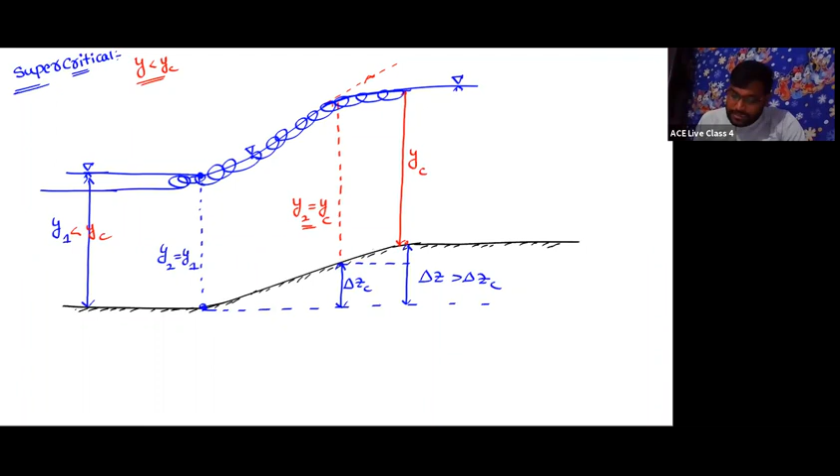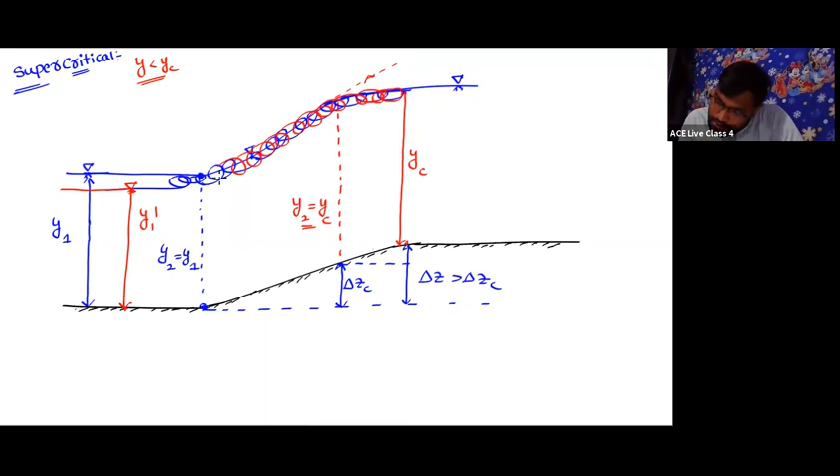So now whatever this is, it is nothing but y1 dash. That's going to be y1 dash. I hope you understood. Once it rises, now the surge will travel towards the downstream. So this surge travels towards the downstream and lowers the water level.

So now if I draw again a similar type of variation for supercritical flow, you can see now, in the case of supercritical flow, delta Z and y1, y2, and somewhere over here, this is delta ZC. Okay, so initially, since this is subcritical flow, that's the reason I took a larger depth. But now in this case, this is supercritical flow, right?

As it is supercritical flow, initially the depths of flow are going to be less, y1 and y2. So when delta Z is 0, when delta Z is 0, E1 and E2 are both the same, then y1 and y2 are both the same.

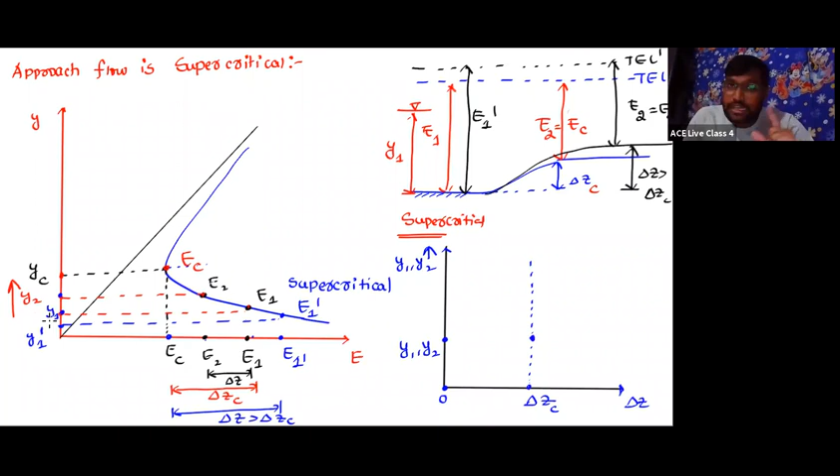Now, up to delta ZC, there is no change in y1, yes or no? Up to delta ZC, no change in y1. Upstream depth is going to be the same. Up to delta ZC, no change in the upstream depth. Okay.

But what is happening to the downstream depth? You see here, the downstream depth is going to be increased from Y1 to Y2, and Y2 to YC. So the downstream depth increases until delta Z equals delta ZC. This Y2 equals YC. And beyond delta ZC, everywhere Y2 equals YC only.

But what is happening to upstream depth? The upstream depth is going to be decreasing from Y1 to Y1 dash. So beyond delta ZC, E1 becomes E1 dash. Y1 is going to be reduced to Y1 dash.

So now I hope you understood. I have not given you the points, but you know what is happening from the specific energy curve. If you still don't get this, please go back to the notes, and after class go through the videos so you can understand much better, because I have taken almost 2 hours for explanation of this one transition itself. I hope you got it.

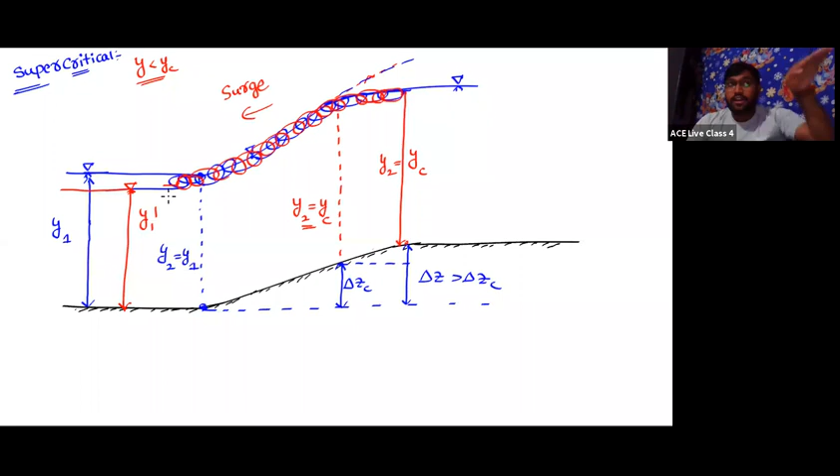Repeating again, when there is a channel bottom rise, there is a critical state. Critical state means critical depth on the downstream side. On the upstream side, let's say subcritical flow. I'm starting subcritical, I have to reach critical. Subcritical to critical, then is the downstream water level falling or rising? Falling. Downstream water level is going to be falling. And if it goes beyond delta ZC, then due to this surge, the upstream water level is going to rise. Now apply the same thing for supercritical flow.

Now, channel bottom rise, somewhere critical, but in supercritical flow, is the depth less than critical or more than critical? Less than critical. Now this is critical, this is supercritical. I want to reach from supercritical to critical.

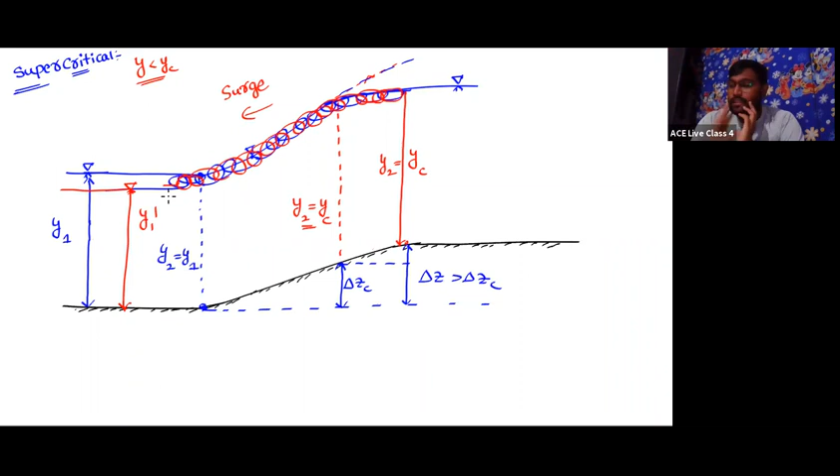Then is the water level going to be rising or falling? The water level is going to rise. When the water level rises on the downstream side and beyond delta ZC, the upstream water level is going to drop. If you have any doubt, please go back and have a look.

In the case of subcritical, first the downstream water level falls and then due to surge, the upstream water level rises. And in the case of supercritical, first the downstream water level rises and due to surge, the upstream water level falls. I hope you understood this in a layman way also.

A lot of people are misjudging the concepts over here, sir. In subcritical, water level is rising, so TEL is rising. But here water level is rising, but why is TEL not falling, sir? See, TEL, total energy, is not about water level, my dear. Total energy is depth and velocity. Think about that, depth and velocity.

Please observe the graphs carefully. Just don't blindly go to the points. I'm explaining every point over here. You see, in the supercritical case, I'm increasing the specific energy from E1 to E1 dash, right? But what is happening to the depth? Y1 is reducing to Y1 dash. Observe the graph.

Just see, when you are asking a question, think right. Think.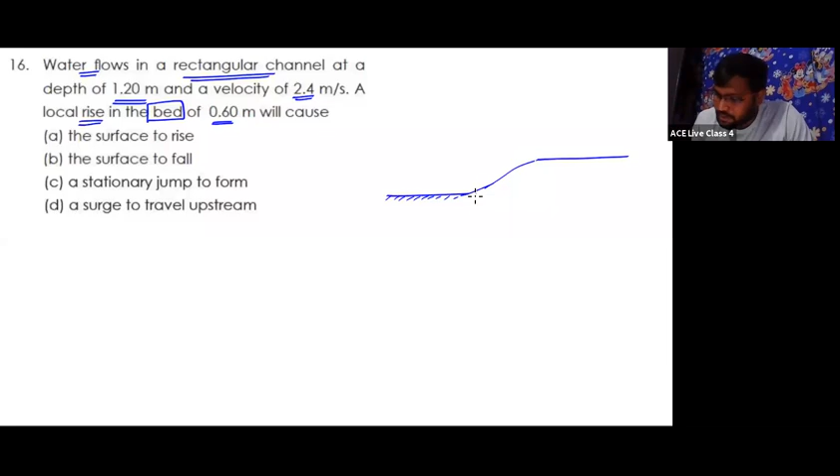Now, I am saying the local rise means rise of the bed level. Have I mentioned anything regarding width change? No. Whenever I discuss channel bottom transition, I keep the width constant. So let me draw the figure. This is a channel bed rise. And how much rise have we done? Delta Z equals 0.6 meters. This is the 0.6 meters.

And you know that this is nothing but the total energy line. Total energy line. And whatever the initial depth of flow I have given you, the initial depth of flow is Y1. So what is Y1? 1.20 meters. And what is the velocity? The initial velocity V1 is 2.4 meters per second.

See, once we know the type of flow, once we know the velocity and depth, can I find out the Froude number? Yes or no? Once I know the depth of flow, I can find out the Froude number. Because if you want to say whether the water level is going to rise or fall, it depends upon whether the flow is subcritical or supercritical. So now, in order to say whether the flow is subcritical or supercritical, I need to find out the Froude number. What is the Froude number?

V by root of gY. Because in a rectangle, D is nothing but Y, right? So in rectangle, D equals Y. So now what is initial velocity? 2.4 by root of 9.81 into 1.2. Do I need to find out the value? No, I don't need to, because root 9.81 is more than 3. 2.4 divided by more than 3 is going to be less than 1.

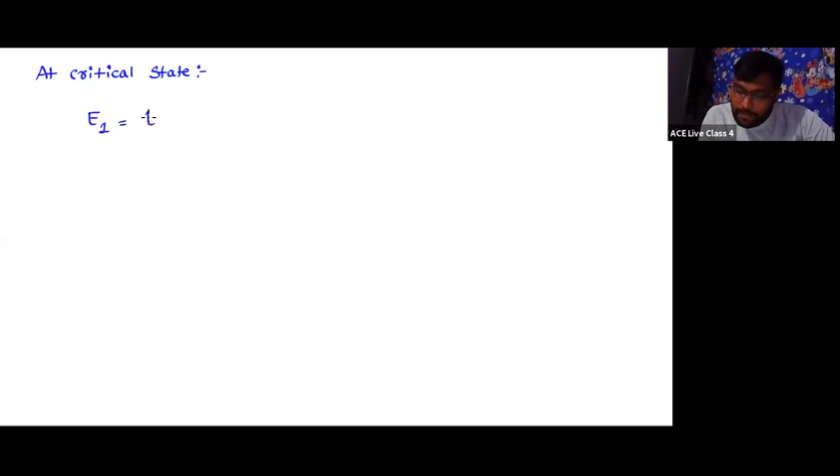So first we find out delta ZC. How, sir? At the critical state, whatever the specific energy at section 1 is - if I write this as delta ZC, then this becomes E2. This is E1 and here it is E2. Whenever I write delta Z as delta ZC, then E becomes EC and delta Z becomes delta ZC.

Okay, so now with this concept, what is E1? Y1 plus V1 square by 2G equals EC. In the case of a rectangle, EC is nothing but 3 by 2 YC. I hope you remember this EC concept. EC equals 3 by 2 YC

plus delta ZC. So in order to find this delta ZC, I have V1 with me, I have Y1 with me. I need to find YC, yes or no? So how to find YC, sir?

YC equals Q square by G, whole to the power of 1 by 3. Yes or no? So how to find Q, sir? Small q - whatever the depth, in the case of a rectangle, small q is nothing but V into Y. Yes or no?

So what is Q over here? V1 times Y1, that is 2.4 into 1.2. What is this value? 2.4 into 1.2, which comes to 2.88 meters square per second.

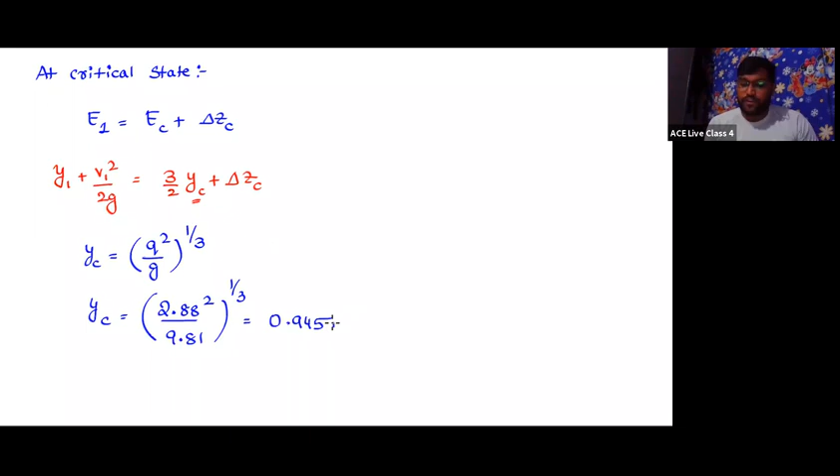So, square by 9.81 whole to the power of 1 by 3, the value comes to 0.945 meters. Now please substitute all these values.

So what is Y1 given? The given Y1 is 1.2. So 1.2 plus 2.4 square by 2 into 9.81, this equals 3 by 2 into 0.945 plus delta ZC. So please find out the delta ZC for me and tell me the answer.

If delta Z is not given for us, then we can go for option 2. But as delta Z is given, you cannot go for option 2.

So come on, tell me this delta ZC value. Find out the delta ZC value. How to say that delta ZC? I'm not going to solve that. I think it comes as 0.076. Yes or no? 0.076 meters. But given delta Z is 0.6 meters, it is way more than the delta ZC. So the given delta Z is going to be greater than delta ZC.

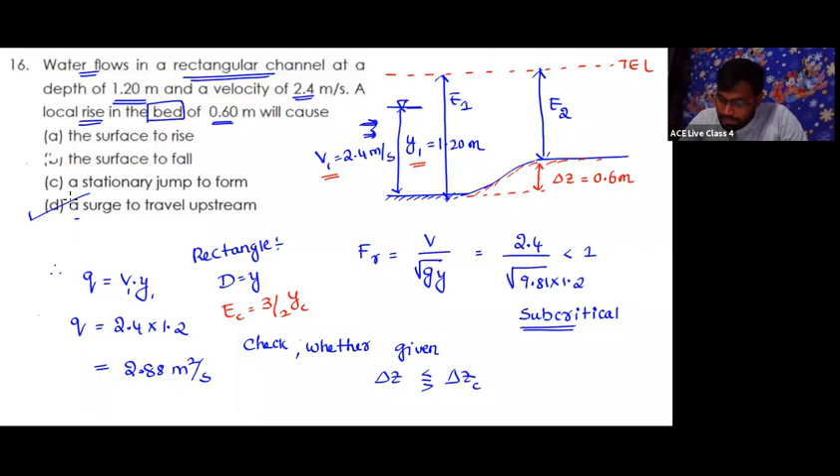Okay, I hope you understood the way to understand this problem. If you still have any doubt, please go through the video once again once it is uploaded, and go through the class notes. This is to check, I have used this one and checked it at the end.

Okay, so now let's see the next question.

Yes, so see this question please. This is GATE 2016 set 2 marks question.

I'll frame the question, wait for that. I'll frame that in other way also. So first, let me go with the actual concept, then I'll frame the questions.

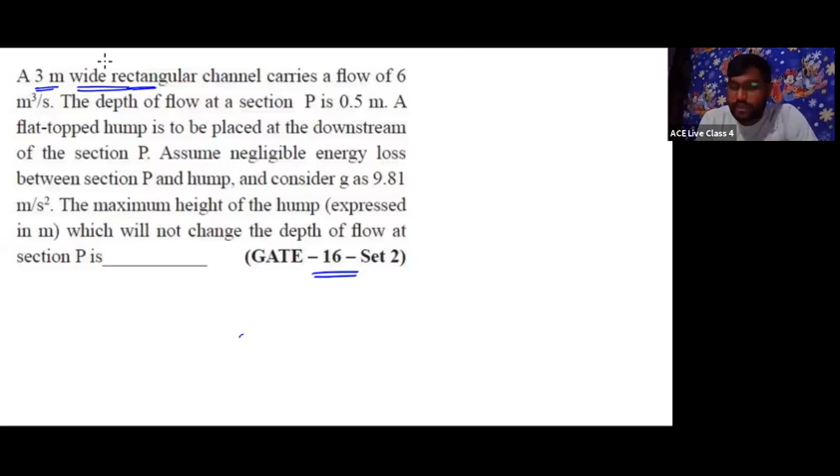Okay, so now a 3-meter wide rectangular channel. Again, whatever the channel is, it's a rectangle, so don't think this is a wide rectangle, that's not a wide rectangle. It's a 3-meter wide, which means the rectangular channel is going to be having a width of 3 meters. So the channel is going to be a rectangle and width of the rectangle is going to be 3 meters. Carries a flow, which means a discharge of 6 meter cube per second. The depth of flow at section P is 0.5 meters. So the depth of flow at section P is going to be 0.5 meters.

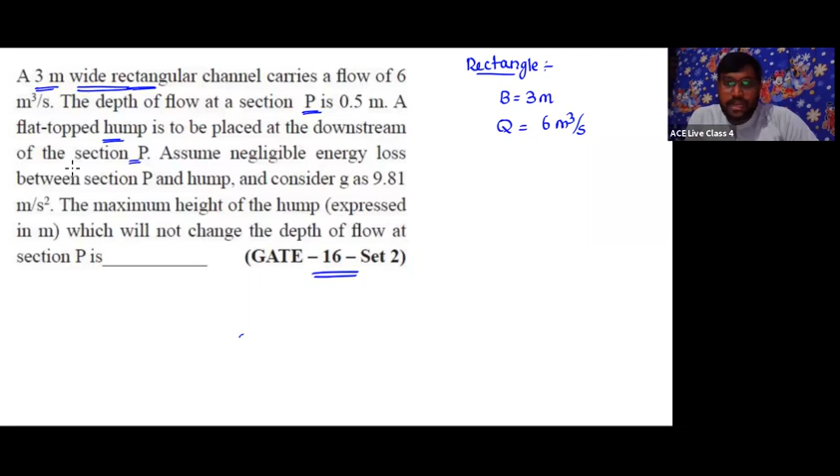A flat topped hump, what is the meaning of a flat topped hump? Means a channel bottom rise. So a flat topped hump is to be placed at the downstream. You're going to place a flat topped hump at the downstream section of P, assuming negligible energy loss between section P and hump. See, what I am going to do is, this is a channel bottom, and now I have provided some hump over here. So whatever, this is nothing but a hump. I'm going to provide the hump over here, means rise by delta Z.

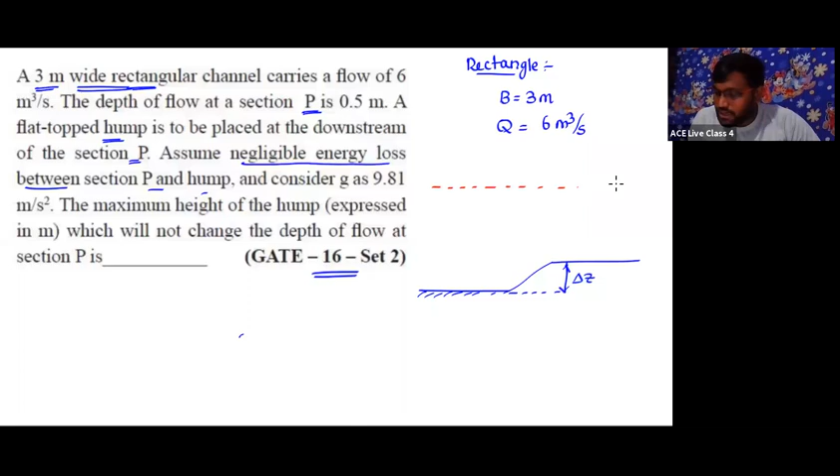Now, assuming negligible energy loss. What is the meaning of negligible energy loss? Negligible energy loss means frictionless, which means total energy line is going to be constant. So whatever I provided over here, this is nothing but the hump. So there is a flat top hump I have provided. Now, G value as 9.81 they have given. And at section P, what is the depth of water? The depth of water is going to be Y1 as 0.5 meters.

The maximum height of the hump which will not change the depth of flow at section P. What is the maximum height of a hump which will not change the upstream depth of flow? See, the section P is at upstream or not? This is upstream and this is downstream, yes or no? So maximum rise to provide without a change in upstream depth is delta Z max equals delta ZC.

Yes or no? So whenever the delta Z, they are asking the maximum, when delta Z max, then that is going to be delta ZC, right? So now, how to find out this delta ZC, sir? Just now I have mentioned how to find out delta ZC. If I can write down the relation between the specific energies, now this is E1, and here it is going to be, when delta Z max, then it is going to be EC.

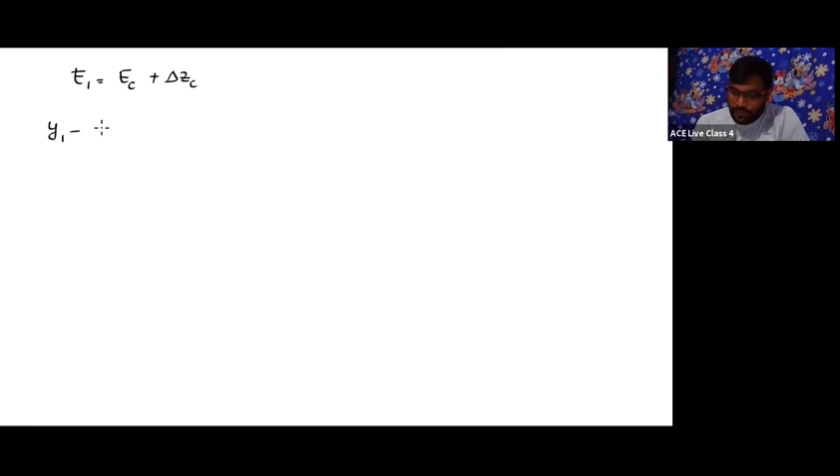They are asking the maximum height of the hump to not disturb any water surface, which means delta ZC. So now from the figure, I can write down the specific energies. E1 is equals to EC, plus delta ZC. And what is E1? Y1 plus V1 square by 2G is equals to 3 by 2 YC plus delta ZC.

In the previous question, I gave you depth and velocity, but here I've given the discharge. So can I write velocity V1 as discharge by area at 1? V1 is discharge 6 by area 3 into Y1, which is 0.5. So V1 comes out to be 4 meters per second.

Once I know these two, what is small q? Small q means 6 by 3, which is 2 meters square per second. Now I can substitute these values. I have velocity, I have initial depth of flow 0.5, and I have q.

So now I'll write directly: y1 plus v1 square by 2g equals 3 by 2 into q square by g, whole to the power 1 by 3, plus delta zc. Y1 as 0.5 plus V1, 4 square by 2 into 9.81, equals 3 by 2 into Q value, 2 square by 9.81 whole to the power 1 by 3, plus delta ZC.

Please find out the delta ZC value. Please find out the delta Z value. What is the delta Z, please?

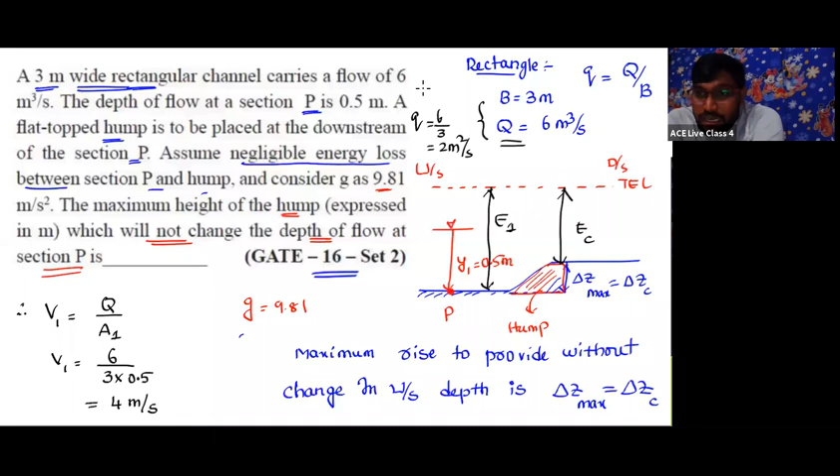Allow the flow into that channel. If you observe, suddenly once the water level crosses that hump, the water comes back as a surge movement. What does that mean? That means delta Z is greater than delta ZC, which means the design is wrong. So when there is a choke condition, flow will not occur, sir.